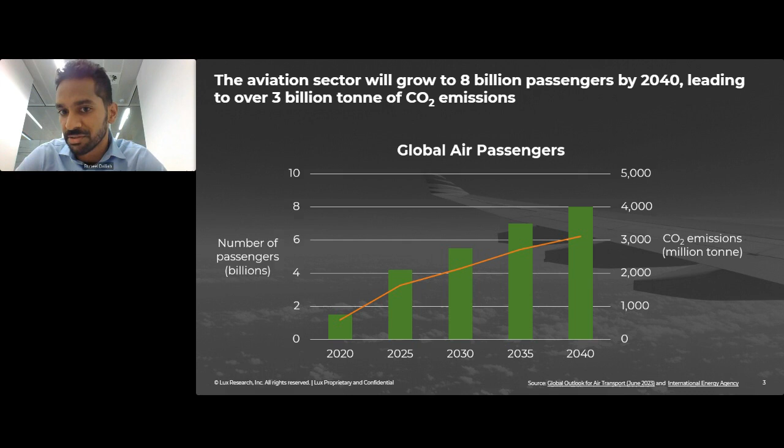Now, together with that growth in global air passengers, you also have an increase in CO2 emissions. What you see here on the orange line is a projection of CO2 emissions, assuming that we make no efforts to reduce these emissions. Today, we're at around 2,000 million tons of CO2 emissions. If we keep on going as we are today, then we'll reach around 3 billion tons of CO2 emissions.

However, there are initiatives globally around making sure that this does not happen. And one of the major initiatives is the one that has been undertaken by the IATA. The IATA is a global trade association. It's the world's largest association of airlines, and the IATA has over 300 airlines from more than 120 countries.

Now, a couple of years ago, the IATA reached an agreement. And this agreement from the different airlines says that they will do their best in order to reach net zero emissions by 2050. So this was a very big milestone in the aviation sector because now you finally have a target for net zero emissions, and that target is 2050. After announcing that pledge, it is now every airline's responsibility to take measures in order to reach that target by 2050.

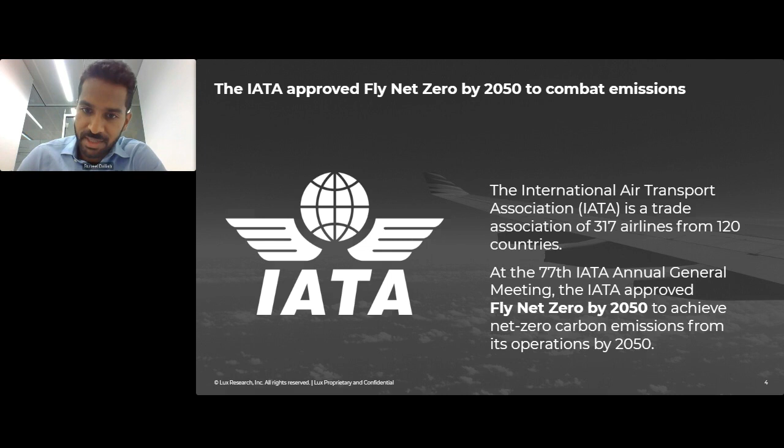For this presentation today, we'll focus on British Airways. Why British Airways? No particular reason other than British Airways is one of the largest airlines in the world and also one with one of the largest networks of destinations. So let's take a closer look at British Airways.

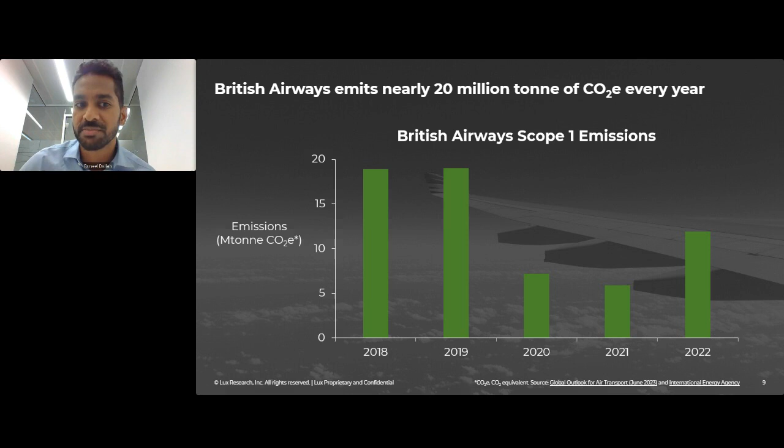So this is a challenge for British Airways: they need to reduce these emissions all the way to zero by 2050. So how can British Airways achieve this target? There are different measures that the company can take. One of the major levers available to airlines is efficiency improvement, essentially making your operations more efficient, buying new fuel-efficient aircraft, and so on.

But what we're here to talk about today is the really novel technologies available to airlines like British Airways to decarbonize their operations. From a technology perspective, there are three options available to airlines around the world. These are electric aviation, hydrogen aviation, and sustainable aviation fuel. So starting with electric aviation, how does that work in the case of an airline like British Airways?

Now, the concept of electric aviation is very similar to an electric car. It's essentially a vehicle that is powered by a battery. In this case here, that vehicle is an aircraft. Now, all electric airplanes will be powered by a battery. So how do you segment the space? The best way to segment the electric aviation sector is by looking at the type of aircraft and the markets that they are targeting.

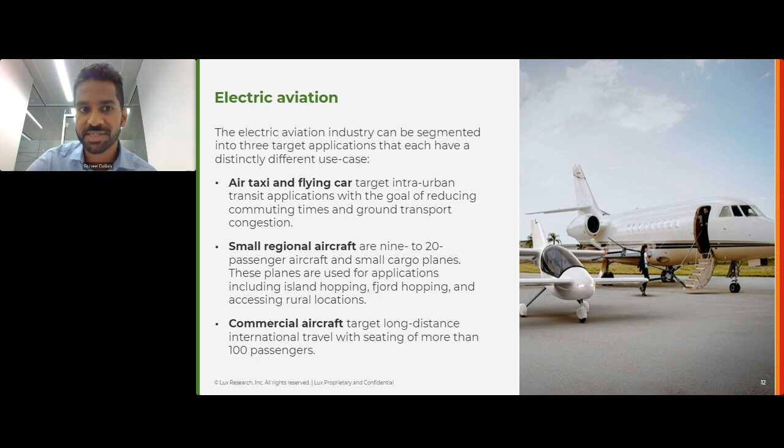Today, electric aviation can be segmented into three different groups. The first one is air taxis and flying cars. The second one is small regional aircraft. And the third one is commercial aircraft. So what are air taxis and flying cars specifically? Air taxis and flying cars are very small aircraft that can fly over short distances.

And the key differentiator here is the fact that these types of aircraft are pursuing vertical takeoff and landing configurations. The big advantage of that is that you don't actually need a landing strip, which means that these aircraft are very well suited for densely populated areas. The challenge, however, is that you cannot fly over long distances with this aircraft, and it's a very small aircraft, so you can carry at most 5 to less than 10 passengers.

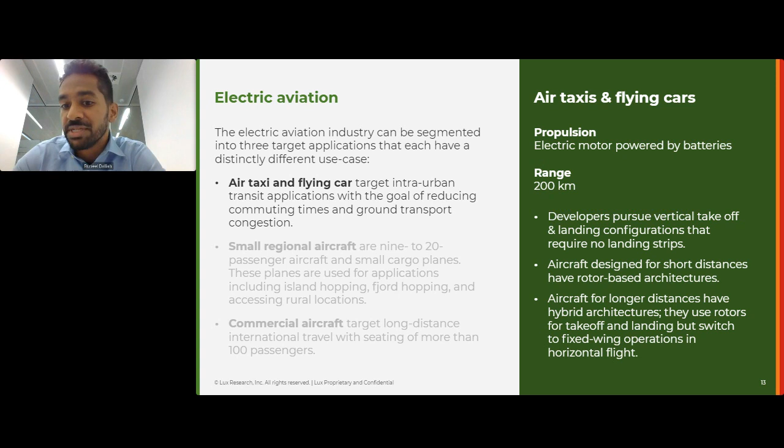So while this is an interesting technology, it's not really relevant for British Airways because British Airways is not really in the business of taxis. The second category is small regional aircraft. This follows a more conventional configuration. It follows a fixed wing architecture, which means that for this aircraft, you do need a landing strip.

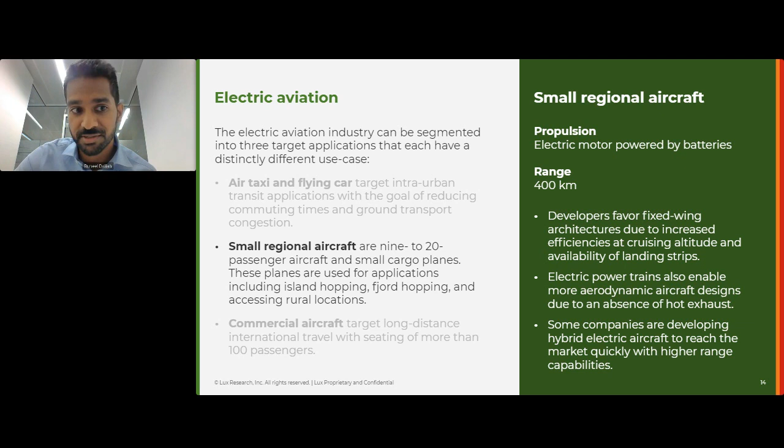Now, while this is interesting, again, it's not really relevant for British Airways because British Airways is in the business of commercial aviation. They're in the business of flying a lot of passengers over long distances, which means that commercial aircraft is what is relevant to British Airways.

Now, commercial aircraft is very much at the early stage today. This is about electrifying a commercial aircraft, even though in most cases, the commercial aircraft will be deployed in hybrid configuration together with hydrogen or with jet fuel. Now, the goal here is not to really reinvent the design of the aircraft, so you're still using a fixed wing configuration, which means that you would still need a landing strip.

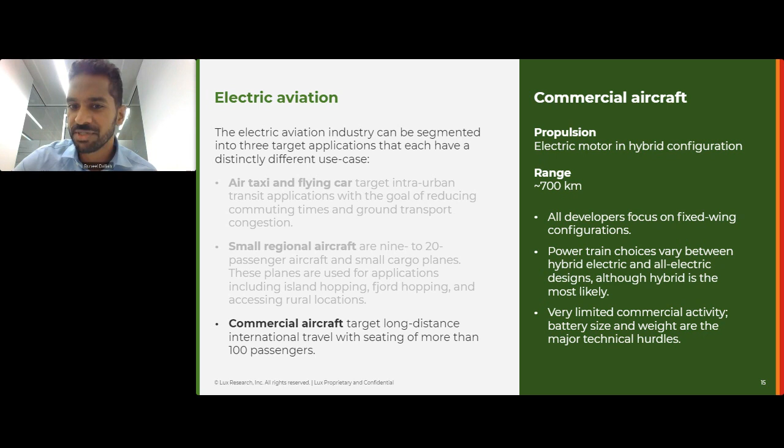However, there's very little commercial activity in electric commercial aircraft. Today, you only have a couple of companies working on this. One of the companies active in the space is Wright Electric. Now, Wright Electric is a startup currently at the early stage, and they're now looking at launching a commercial scale electric aircraft. So right now, they're very much at the small scale.

They are testing an all-electric aircraft, a very small 2 megawatt motor, but their goal, their target, is to actually launch a 186-seater commercial aircraft that could potentially fly a distance of 800 miles by 2030. So this is one of the most innovative developments happening in the space. And as you can see in the figure, you can see the EasyJet logo. This is because EasyJet in the UK has partnered with Wright Electric in order to develop and eventually deploy this aircraft in the market.

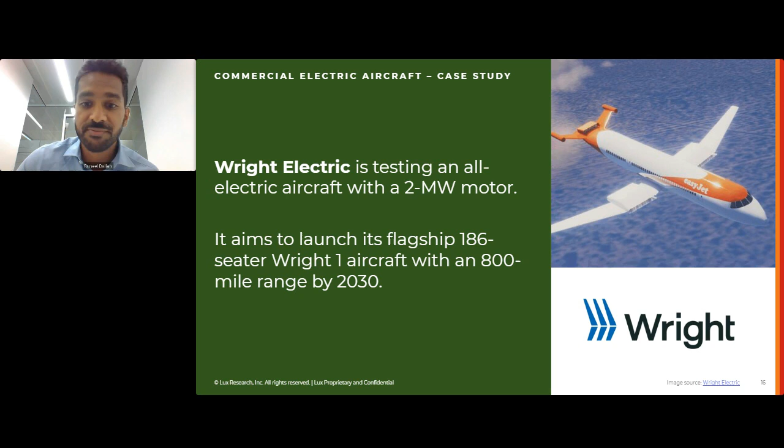But what is the challenge with electric aviation? Why don't you see electric planes flying all over the place? The reason for that is because of the battery that you need. Now, the main challenge with electric aviation is related to energy density. And here on the figure are the energy densities of batteries versus that of kerosene, which today is used as the fossil jet fuel. Now, most commercial aircraft are relying on the lithium-ion battery. The lithium-ion battery is very good for electric cars, but it's not very good for electric airplanes because it has a very low energy density compared to kerosene.

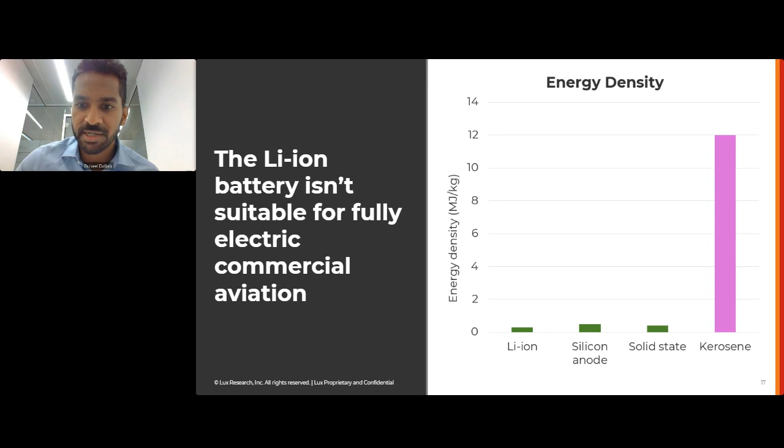If you want to deploy an electric aircraft that flies over the same distance as a conventional aircraft, you would need such a big battery that the plane would be just too heavy to operate. And even if you look at the next generation batteries, like silicon anode, for example, or solid state, they also have a very low energy density. So that's the reason why it is so challenging to deploy electric airplanes. And the only way to do that would be to deploy batteries in hybrid configuration with either hydrogen or with jet fuel.

But let's imagine a scenario in the future where Wright Electric has actually managed to launch their 186-seater airplane in the market by 2030. And let's imagine British Airways has partnered with Wright Electric and they're now using this specific electric aircraft in their commercial operation. So what does that look like for British Airways? How far can they fly with this all-electric airplane? And the answer to that is here on this figure.

With an electric airplane, British Airways could potentially fly from Heathrow all the way to Frankfurt in Germany. Now, as you can see in the figure, this is a very small range. They can't really fly very far with this electric airplane. But what's important to note here is that British Airways is actually hitting many of the key destinations in Europe. That includes Frankfurt, Schiphol in Amsterdam, and Charles de Gaulle in Paris. So these are all major hubs in the European aviation market.

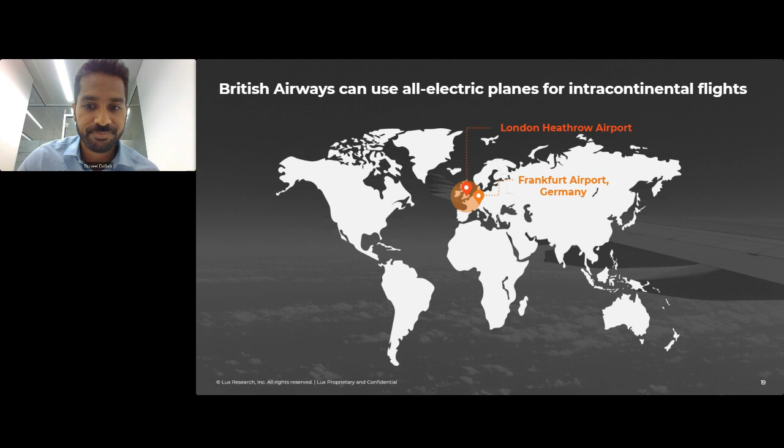And if you remember, most of British Airways destinations are actually in Europe. So even if the range of the electric airplane is very small, British Airways can actually capture quite a large share of its global destinations. So this is for electric aviation. What about hydrogen aviation? Now, there's also activity happening in hydrogen aviation. So how do you segment the space of hydrogen aviation?

Now, unlike electric aviation, where every aircraft was using a battery to power their operation, in hydrogen aviation it's a little bit different. You have two choices: fuel cell or combustion. Fuel cell is where you feed the hydrogen into the electrochemical system to produce electricity, and water is the only emission. And combustion is simply burning the hydrogen in order to produce power to operate the airplane.

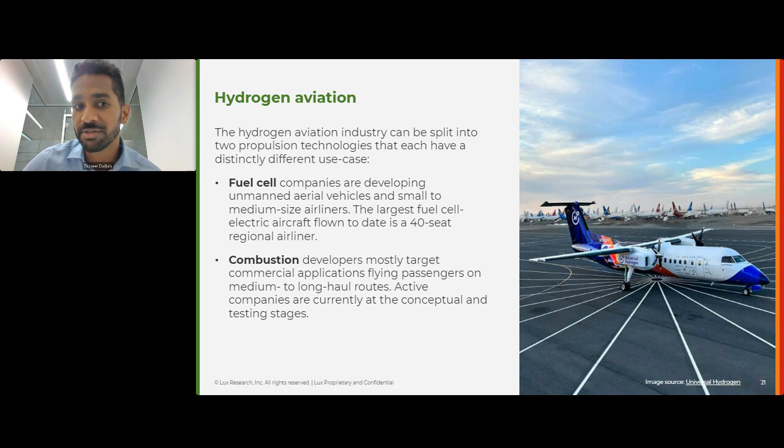So, how do you use a fuel cell in a hydrogen aircraft? The fuel cell is connected to an electric motor. Today, companies are targeting the proton exchange membrane fuel cell. It's the same type of fuel cell that is deployed in hydrogen fuel cell vehicles today. And the reason they are targeting this system is the same as in fuel cell vehicles: these fuel cells can operate at low temperatures, but they can also operate in dynamic mode.

Now, companies are targeting full hydrogen airplanes powered only by a fuel cell, but you can also deploy these fuel cells in hybrid configuration with batteries or even in combustion engines. The main challenge with fuel cells is really the operating conditions. When you use a fuel cell in a car and you simply drive the car over the road, you don't really face many challenges around operating conditions.

It's very different when you're flying an aircraft, because when you fly the aircraft, you go to very high altitude, which means that your conditions around temperature, pressure, and also oxygen concentration will also change. Now, these fuel cells, they have not been developed for high altitude operation. They have been developed for vehicles, which means that if you want to use these fuel cells in airplanes, you really have to take into account the impact that changing operating conditions will have on the fuel cell.

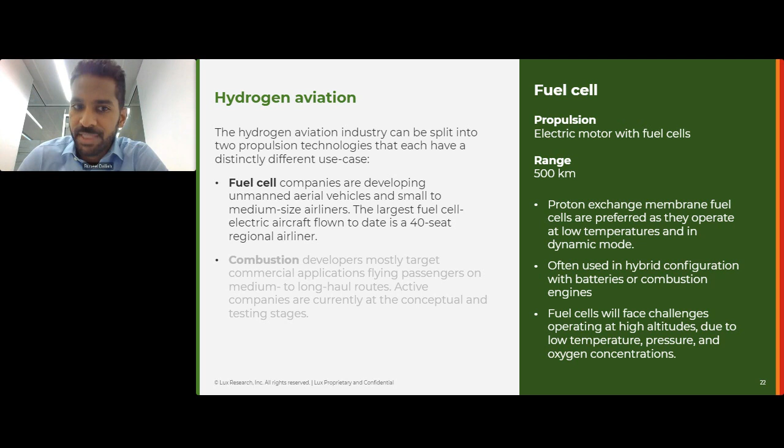Now, one company that is innovating in the space is ZeroAvia. ZeroAvia is currently at the trial stage right now. So they recently just demonstrated a 6-seater aircraft that they flew in January 2023. So this was one of the first demonstrations that we've seen in hydrogen aviation.

Now, ZeroAvia is currently at the trial stage, but they have already announced their target for development. The first milestone is 2025, where they intend to launch a 19-seater airplane that could potentially fly 300 miles. And the second target is 2030, where they have a very ambitious target of flying a 200-seater plane that could fly potentially over 2,000 miles. So this company is very much at the early stage, but they have quite ambitious targets for deployment.

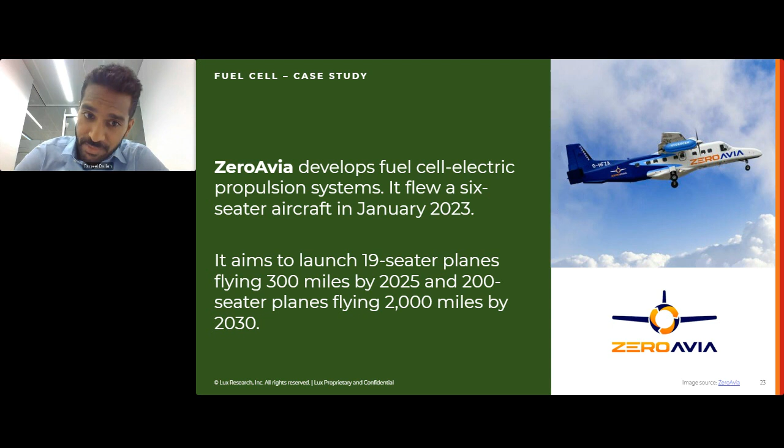The second option in hydrogen aviation, and the one that is really relevant to airlines such as British Airways, is hydrogen combustion. And why is it relevant? Because of the range that you can see here. The range is very big. It's over 3,700 kilometers. Now here, it's essentially the same approach as you have in a jet fuel engine, where you rely on combustion. In this particular case, developers are relying on liquid hydrogen, where you feed the liquid hydrogen into a jet engine.

Now, even though the approach is the same, you rely on combustion, you can't simply use a conventional jet fuel engine and simply put liquid hydrogen in it. Here you have to redesign the combustion engine. You have to develop an entirely new system in order to accommodate liquid hydrogen. And the main challenge with using hydrogen is around flame stability. So you have to make sure that the combustion profile is very stable over the lifetime of the system.

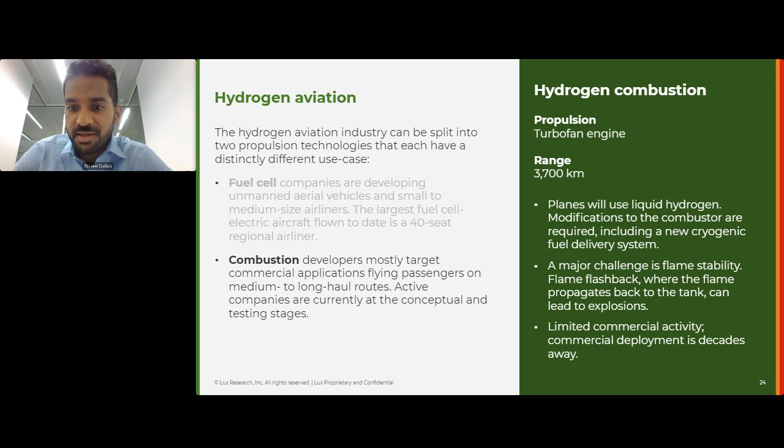Now, it's very challenging to develop a commercial scale hydrogen combustion engine for a commercial aircraft, which is why you have very limited activity in this space. But by far, the main player in this space is Airbus. So Airbus made quite a splash in the news 2 years ago when they launched their ZEROe initiative back in 2021. And with this initiative, Airbus unveiled 3 concepts, so 3 different designs for commercial aircraft that are powered by hydrogen combustion. Now, these designs are not for small planes. These designs are for very large aircraft that can carry hundreds of passengers over long distances.

Now, the designs vary in terms of the configurations of the airplanes, but the most conventional one, the turbofan plane, can potentially fly over 2,000 miles and carry up to 200 passengers. Now, bear in mind that this is a concept. This is not something that is happening today. Even though Airbus did not really disclose a timeline for deployment, we expect that if they manage to succeed in this particular space, you will likely not have these aircraft until after 2035 or 2040. So there's still a long time to go for Airbus to have something commercial that is ready to be deployed into the market.

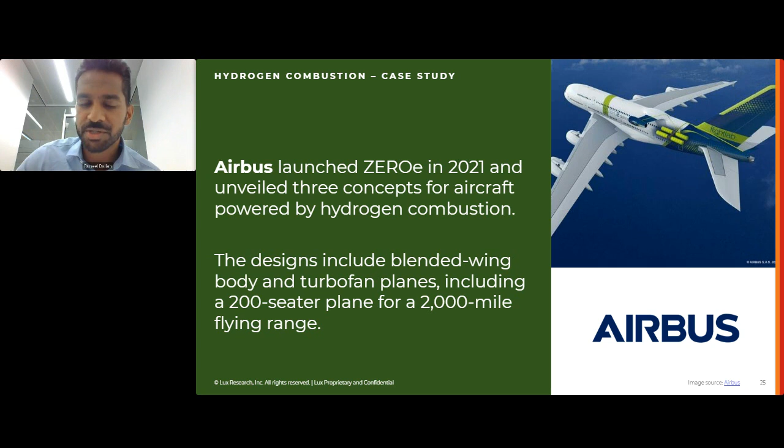But the challenge with using hydrogen in commercial aviation is very much the same as electric aviation. And again, energy density is the main challenge. Now, what you see here is the volumetric energy density of hydrogen compared to kerosene. Compressed hydrogen has an energy density of around 5 megajoules per liter, whereas liquid hydrogen has an energy density of around 8 megajoules per liter. Liquid hydrogen is more dense than compressed hydrogen, which is why developers are focusing on liquid hydrogen. But still, you can see that liquid hydrogen has a much lower energy density than kerosene, and 1 liter of kerosene is equivalent to 4 liters of liquid hydrogen. So that really puts into perspective the challenge that hydrogen aviation will have in order to match the performance of kerosene.

Now you can also see ammonia here. Every time we present this data, people come back and say, well, what about ammonia? Ammonia has a much higher energy density than liquid hydrogen. And they are right, it does have a higher energy density, but it's still much smaller compared to kerosene. So yes, even though ammonia has a higher energy density, it does not mean that it can match the performance of kerosene. And that's not even looking at the fact that ammonia is much more toxic, much more dangerous to handle than kerosene. So it's very unlikely that ammonia will ever be used in the aviation sector.

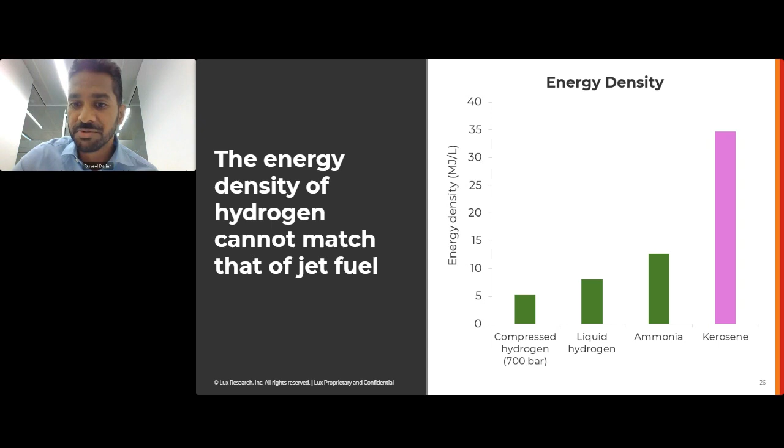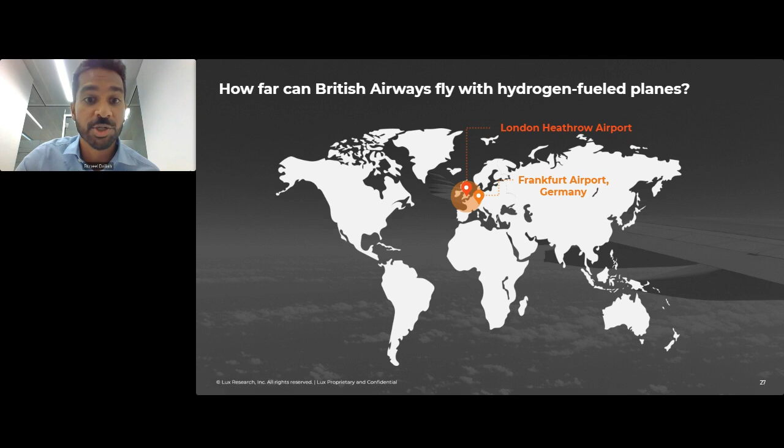But again, let's go back to our scenario. Earlier, we saw how with a fully electric airplane, British Airways can potentially fly from London Heathrow all the way to Frankfurt. But what about a hydrogen airplane? How far can British Airways go with a fully hydrogen airplane? Now, with a hydrogen aircraft, British Airways can potentially go all the way to Dubai in the Middle East, as well as to the JFK airport in New York in the US.

Now, this is very important because with a hydrogen airplane, British Airways could potentially cover all of its European destinations, which is by far its largest market share. But it can also reach very important hubs such as Dubai as well as JFK. So with a hydrogen plane, even though British Airways cannot go all the way to the rest of Asia or to South America, it can cover a very large share of its current network.

Now, remember, this is a hypothetical scenario. Airbus has not yet disclosed a timeline for the deployment of the hydrogen aircraft, and we don't even know if Airbus will be able to achieve that because it's a very challenging space to succeed. But in this hypothetical scenario, British Airways could potentially fly all the way to the US or to the Middle East with that hydrogen aircraft.

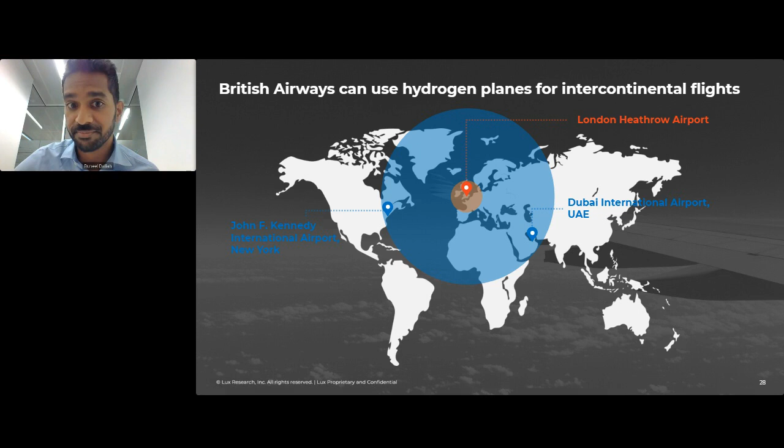So let's go to the last option available to British Airways, and this is sustainable aviation fuel. Now, sustainable aviation fuel is much more developed compared to electric aviation and hydrogen aviation. There's already commercial volumes of SAF being produced at scale today. So how do you segment the SAF space? The best way to do that is to look at the source of feedstock, what type of feedstock is being used to produce a sustainable aviation fuel. And today you can either use bio-based feedstock, which is everything from vegetable oil, from biomass, from sugars, but you can also use CO2 or hydrogen gas, and this is synthetic fuels.

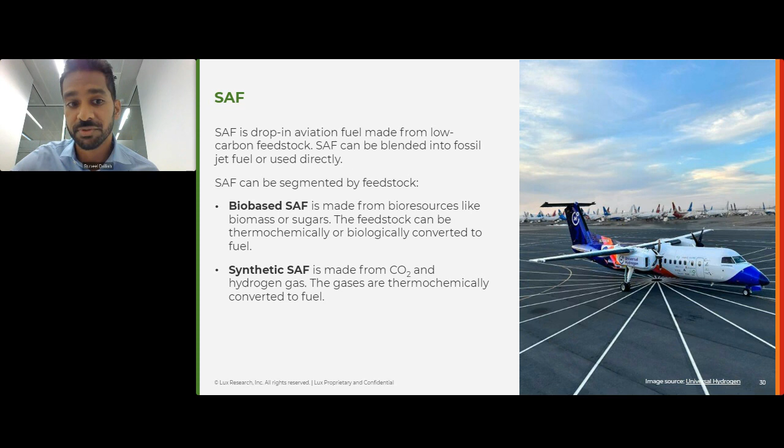Now, as I mentioned earlier, this is a commercial space. It's already being produced at scale today. Now, back in 2019, not much SAF was being produced at scale because SAF is still much more expensive than fossil fuel. And in 2020 and in 2021, we had the pandemic. Not many planes were flying at the time. There was not much reason to produce a large amount of SAF. But you can see that as the sector recovered in 2022 and in 2023, the production of SAF has increased. And today, or at least last year, we produced around 500,000 tons of sustainable aviation fuel.

Now, the IATA projects that by the end of this year, in 2024, we will reach a production of around 1.5 million tons of SAF. We think that it's unlikely. We think this is a bit too optimistic. The likely scenario is that production will increase, but will likely reach around 800,000 tons to 1 million tons of SAF. We think that an increase all the way to 1.5 million tons is unlikely because today SAF is still expensive, and even though the policy market is getting better with the IRA in the US and ReFuelEU in Europe, it's very unlikely that these policy movements will lead to such a big increase in SAF production.

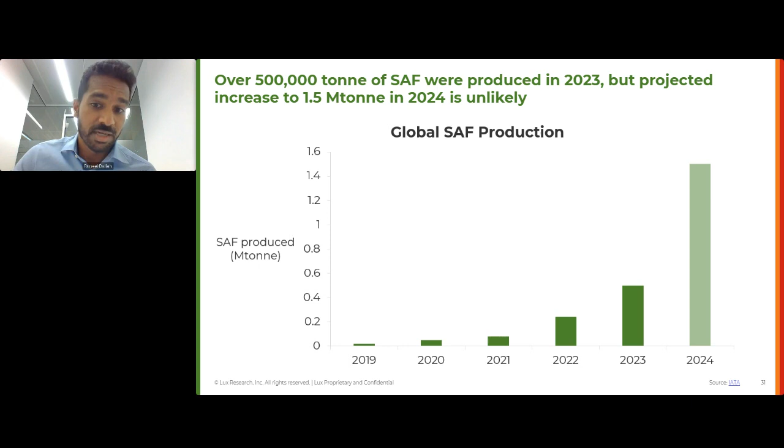So how does it work? The HEFA pathway is essentially taking bio-oil, which is either vegetable oil, soybean oil, for example, or waste oil, like used cooking oil or animal fats. What the goal here is to convert this oil into a fuel fraction with the addition of hydrogen. Now you essentially hydrogenate the oil, you refine the mixture to produce SAF, but also renewable gasoline and renewable diesel.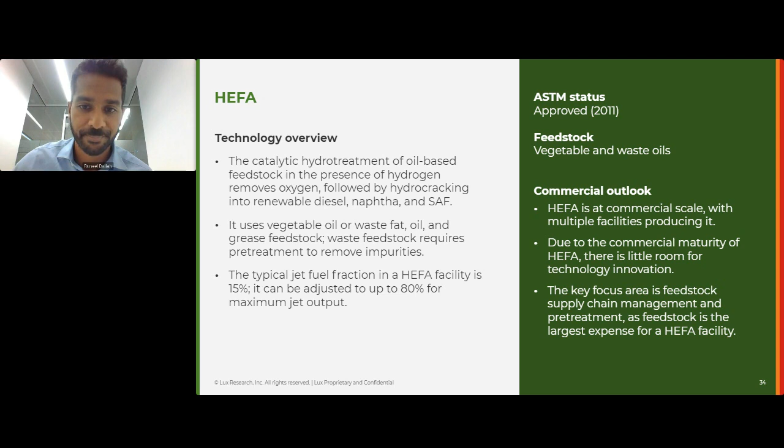Now, this is a commercial pathway, and you already have commercial facilities. And the largest company in this space is Neste, based in Finland. Neste is currently operating 2 biorefineries, one in the Netherlands and one in Singapore, that have a combined capacity of 3 million tons of renewable fuel. Now, bear in mind that this is renewable fuel, which includes everything from renewable gasoline, renewable diesel, as well as sustainable aviation fuel.

Now, even though Neste has not really disclosed how much of that 3 million tons per year is SAF, we expect that number to be very low because the market for renewable fuels today is really in the road transportation sector and not yet in the aviation sector. But essentially, if the demand for SAF really goes up in the future, Neste has the flexibility of diverting some of their fuel production away from road transportation and into the aviation sector.

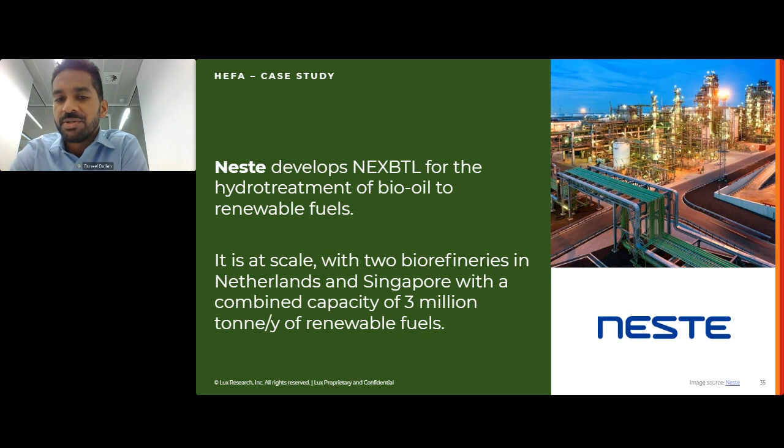Now, the second pathway currently in development is known as Fischer-Tropsch. Fischer-Tropsch is a thermochemical pathway where you take syngas and convert that into liquid hydrocarbon, which is then refined into fuel fraction, diesel, jet fuel, as well as naphtha and waxes. Now, the syngas can come from any source. It can come from coal or natural gas, for example, even though today no one is looking at producing jet fuel from natural gas or coal.

Most companies are focused on sustainable feedstock, and in this case here, you can potentially use municipal solid waste or biomass, which you can gasify into syngas, or you can use hydrogen and CO2. This is known as synthetic fuel, where you convert the hydrogen and CO2 into syngas, and then you feed that into a Fischer-Tropsch reactor. Now, this is currently in development. Today, you only have a demo scale facility that was launched 2 years ago.

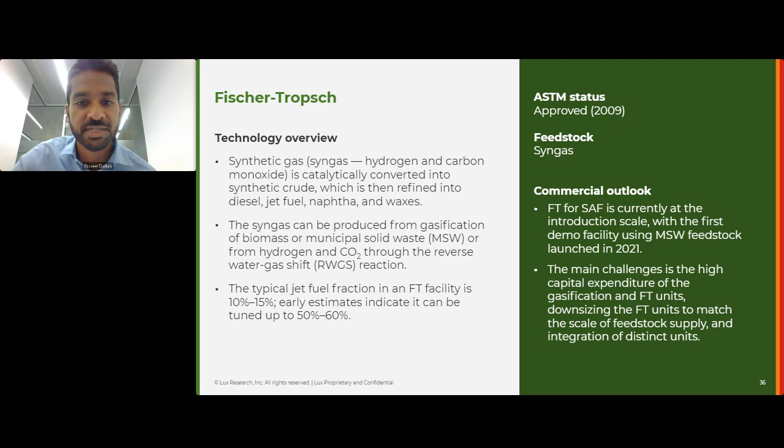And the main challenge with Fischer-Tropsch is really the cost of the technology. Both the gasification unit and the Fischer-Tropsch unit are very capital intensive, it's very expensive, and you also have the added challenge of integration. Integrating these 2 units is a very complex approach, which not many companies have succeeded at so far.

Now, one of the success stories in this space, and really the only one so far, is Fulcrum Bioenergy. Fulcrum Bioenergy is a startup based in the US, and 2 years ago, they launched the first demo-scale facility producing SAF from a bio-based feedstock. In this case here, it's MSW. Fulcrum Bioenergy takes the MSW, they gasify it into syngas, and then turn that syngas into fuel.

That facility is a demo-scale facility. It has a production capacity of 10 million gallons per year, although it's unlikely that today Fulcrum is actually using the full capacity of that facility. Now, what's important to note here is that Fulcrum Bioenergy is actually using the Fischer-Tropsch technology from Johnson Matthey, who is one of the leaders in this space.

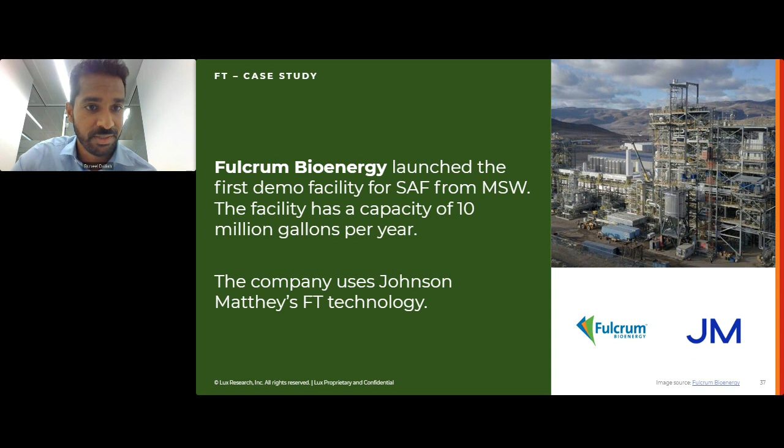Now, the third and last pathway which we'll look at today is the alcohol-to-jet pathway. As the name says, this is a pathway where you convert the alcohol into jet fuel. And today, the only alcohols approved for commercial operation are ethanol and isobutanol. So this is a pathway where you essentially dehydrate the alcohol into its alkene, and then you oligomerize this alkene into long-chain hydrocarbon, which you then refine into fuel fractions.

Now, this is not yet commercial. This is currently in development, but the first demo facility was actually launched just 2 weeks ago by LanzaJet in the US. Now, the advantage of this platform is that on paper, it's meant to be cheaper than the Fischer-Tropsch technology, because here you're using inexpensive systems as well as catalysts. But again, this is currently in development, and it remains to be seen whether this technology is actually much cheaper than the Fischer-Tropsch pathway.

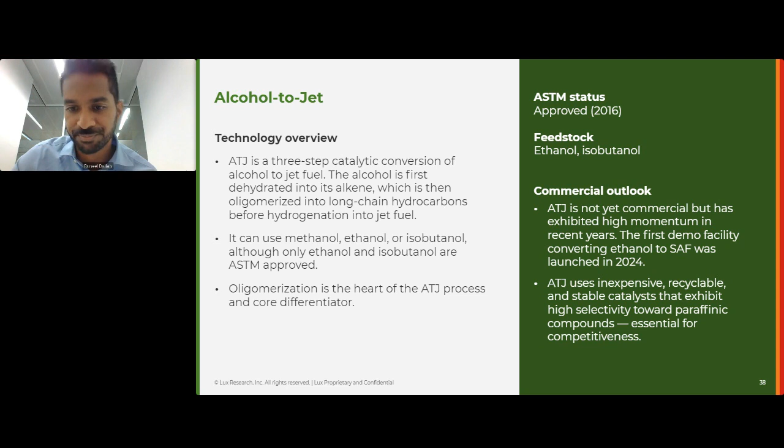But we'll know very soon, because LanzaJet actually launched the world's first demo facility for alcohol-to-jet. In this case here, LanzaJet launched a 10 million gallon per year facility in the US, where they are converting, or they will be converting, ethanol into jet fuel.

So with this facility, LanzaJet will be able to really optimize the system, learn from the system, and eventually use these learnings in order to scale to a much bigger capacity. And also the important thing to note here is that the ethanol that LanzaJet is using is first generation ethanol, likely corn ethanol, which is widely available in the US.

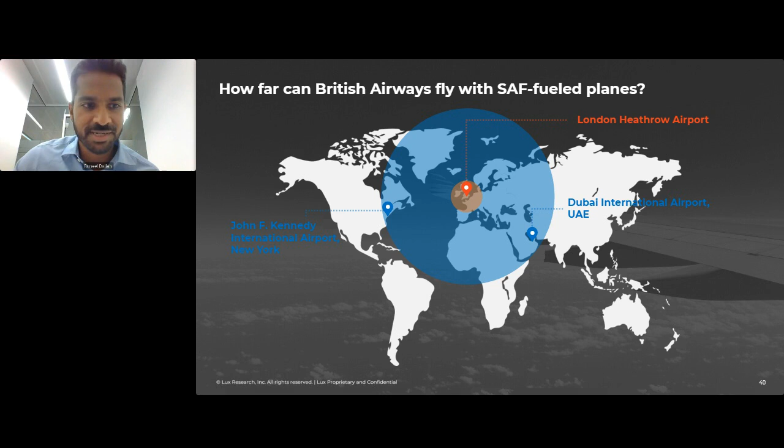Now, going back to our scenario, we've seen how with an electric airplane, British Airways could fly to some parts of Europe. With hydrogen airplanes, British Airways could cover all of Europe as well as parts of the Middle East and the US. How far can British Airways fly with a SAF fuel airplane? Well, the answer in this case is less interesting than before, because technically SAF is almost identical to fossil jet fuel, which means that with SAF, British Airways can cover its entire network, as you can see here on this figure.

Now today, the longest flight that British Airways is operating is the flight from London Heathrow to Santiago Airport in Chile. This is a 14-hour flight, and with a SAF fuel airplane, British Airways can easily reach that destination. So in this hypothetical future scenario, you could expect British Airways to use electric airplanes for Europe, hydrogen airplanes for the Middle East and the US, and SAF for the rest of its network.

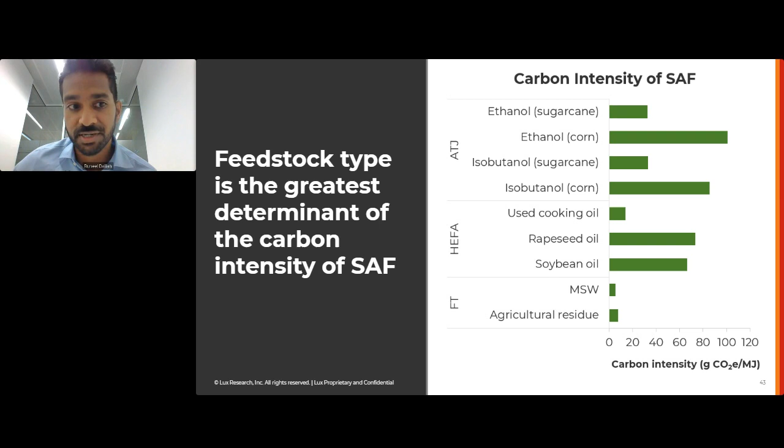You can potentially reach a lower cost SAF if you were to use waste oil, for example, but then you run into the issue of supply. If you want to use MSW, then here you have to use the Fischer-Tropsch pathway, which is expensive and complex to scale. In the case of alcohol to jet, you can potentially get a cheaper fuel if you were to use ethanol, but ethanol is a first generation feedstock, which means that you won't be as sustainable, especially if you're operating in regions like the EU, for example.

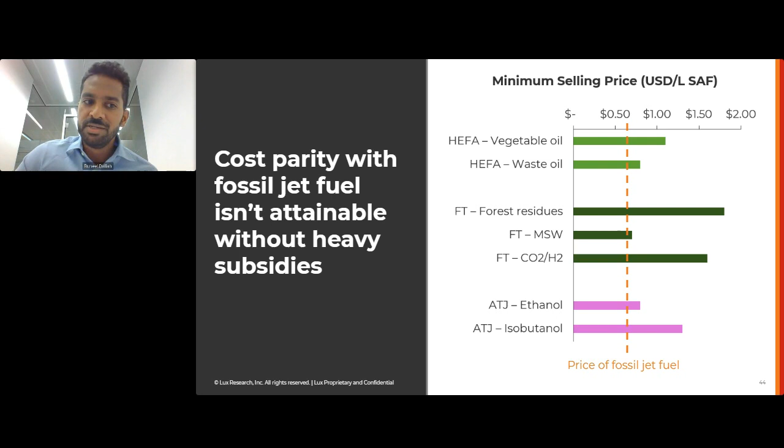So you can see that when it comes to SAF, you have a range of challenges, and each of the three technology options available today overcome some of these challenges, but none of them overcome all of the challenges. To recap, for HEFA, it's a commercial technology. It's low cost if you're using vegetable oil, and you have a robust developer landscape here. You have very good companies active in the space. However, if you're using vegetable oil, that means you are unsustainable. If instead you want to be sustainable and use waste oil, you then run into the issue of feedstock supply.

In the case of Fischer-Tropsch, if you're using municipal solid waste or agricultural residues, then you are sustainable and you have access to a wide range of feedstock. And you also have very strong companies operating in the space, because this is where you have Johnson Matthey, Topsoe, Shell, Sasol, and so on. However, there are many challenges with Fischer-Tropsch technology itself. It's very capital intensive and it's also quite complex to scale.

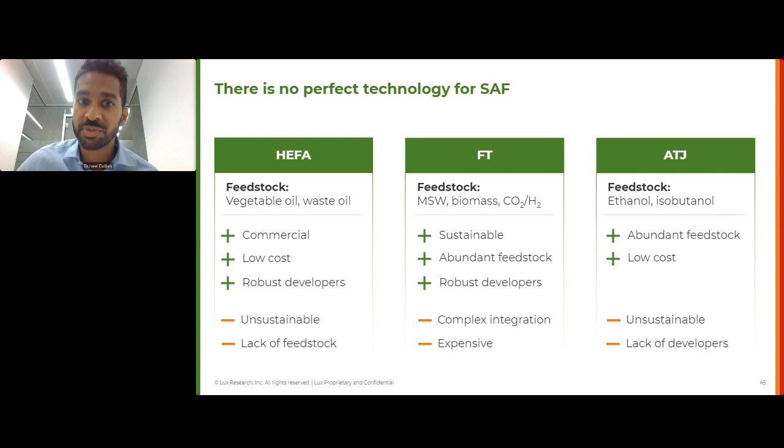With alcohol to jet, you have access to an abundant source of feedstock, because here you're using ethanol or isobutanol, and it's also a low-cost technology. However, ethanol and isobutanol are first-generation feedstock, which means that it's not sustainable, and it also does not have many players in the space, because this space today is mostly dominated by startups like LanzaJet, like Gevo, which, even though they are good companies, they're not really the type of companies to build very large-scale facilities. So you can see that today, the options that we have for SAF are good enough for the near term, good enough to scale the industry, but they're not perfect in order to support the global SAF sector.

Now, the perfect SAF technology is the one that ticks all the boxes, the one that has all the characteristics that you see here on the left. So is there a SAF technology in development today that actually ticks all these boxes? We think there is one, and that technology is known as methanol to jet. Now, how does methanol to jet work? Methanol to jet is essentially where you're relying on green methanol. So green methanol produced from CO2 and green hydrogen, you combine it into methanol, and you then turn that methanol into jet fuel. So methanol to jet is a type of alcohol to jet pathway, although methanol is not yet approved. So this is something that you cannot do today. You will have to go through the whole process of getting methanol approved as a feedstock before you go to the market.

But why do we say that methanol to jet is as close as you can get to a perfect SAF technology? It's because with methanol to jet, you have access to abundant and sustainable feedstock, because if you're relying on CO2, either from direct air capture or carbon capture, or on green hydrogen, this is widely available, or it will be widely available very soon, and it's also very sustainable. The other advantage is the technology. Alcohol to jet technology is not a very complex technology, which means that it can quite easily be scaled.

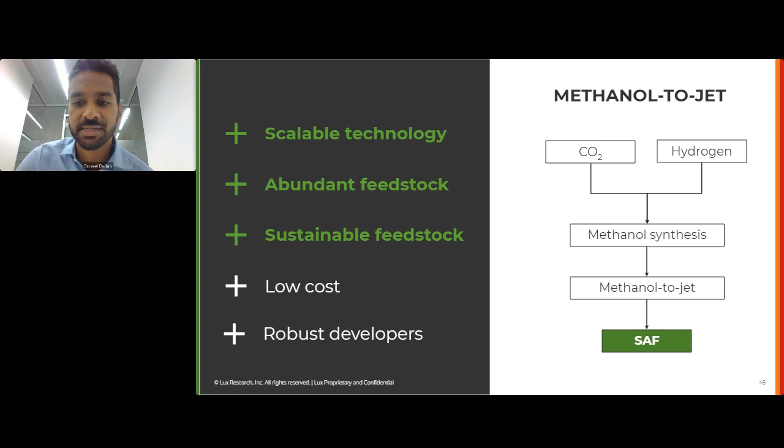The other aspect is the cost of fuel production from methanol to jet. Now, we're not saying here that methanol to jet is cheap, because as you can see in the figure, it's not. It's actually more expensive than ethanol to jet, for example. But methanol to jet competes directly with the Fischer-Tropsch pathway that is using CO2 and hydrogen. In this case here, you can see that methanol to jet is actually cheaper than Fischer-Tropsch. Now, methanol to jet is very much at the early stage today. So this cost that you see here is only an estimate. As the technology is being developed and scaled, we expect the cost of methanol to jet to actually go down with time.

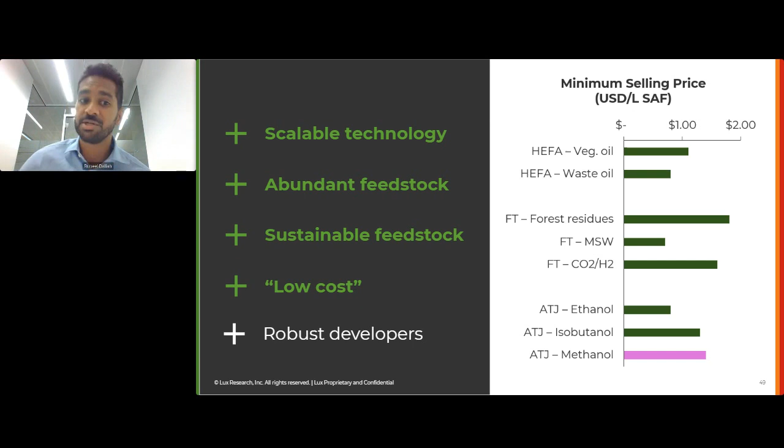But the other big advantage that methanol to jet has is really the strength of its development landscape. So what you see here are 5 different companies, 5 large corporations that are each developing their own methanol to jet technologies.

So these 5 companies have actually unveiled their methanol to jet technology last year. Here you have ExxonMobil, Topsoe, Honeywell, Total, and Axens, all of them already large players in the fuel sector today and looking at developing and deploying methanol to jet technology in the near term. So for all of these different reasons, scalable technology, abundant and sustainable feedstock, low-cost production, as well as strong development landscape, this is why we say that methanol to jet is the most promising opportunity in the SAF space today.

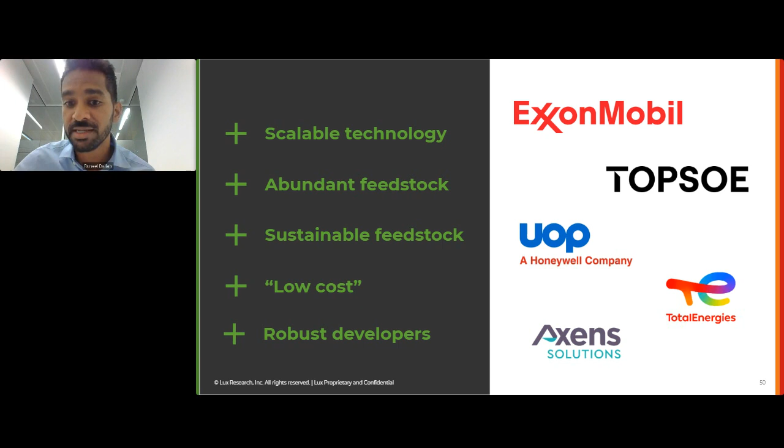If you look at the operations of British Airways today, British Airways has 5 daily flights from London Heathrow to Frankfurt. And for these flights, British Airways is using an Airbus A321 that can carry around 240 passengers. If British Airways were to electrify this flight, then they would need 2 electric airplanes in order to have the same capacity as an Airbus A321. And the reason for that is because the electric airplane that the company is developing can only carry potentially around 100 passengers. So in this case, they will need 2 aircraft to replace 1 Airbus.

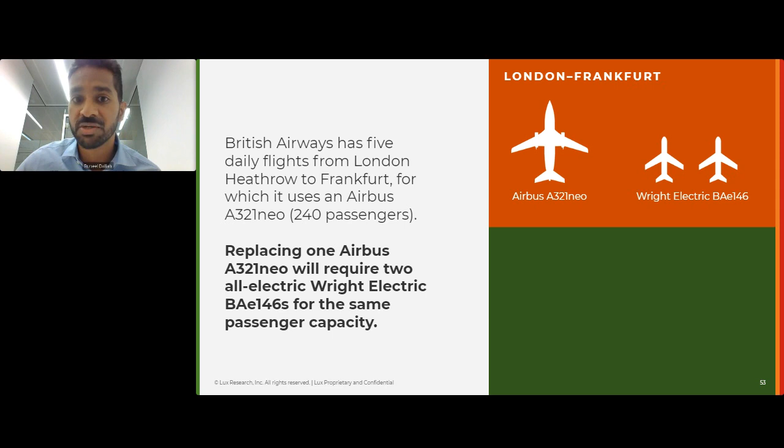And the same thing goes for hydrogen aviation. Today, British Airways actually has 8 daily flights from London Heathrow to JFK. And for that, it's using a Boeing 777 that can carry around 370 passengers. If British Airways were to rely on the Airbus hydrogen airplane, it has a capacity of around 200 passengers. That means that British Airways will now have to fly 16 times from Heathrow to JFK in order to carry the same amount of passengers.

Now, looking at this, you may think that, okay, this is inconvenient because you have to replace every Airbus, every Boeing with 2 airplanes, 2 electric or 2 hydrogen airplanes. It's inconvenient, but it's not really unfeasible, because that's something that could be done, and you'd be right. However, bear in mind that British Airways is not the only airline operating out of Heathrow. There are actually many airlines using Heathrow as their base. And in 2019, before COVID, London Heathrow was actually already at capacity.

London Heathrow has a legal cap of 480,000 flights a year, and in 2019 they were almost there with 475,000 flights a year. Which means that if an airline like British Airways would like to deploy electric and hydrogen planes in order to decarbonize their operation, they will actually not be able to do so because there simply is not enough space at London Heathrow to accommodate these additional planes. Which is why, when it comes to decarbonizing the aviation sector with electric or hydrogen aircraft, the range matters. You have to be able to fly to your destinations, but you also have to make sure that there is space for your aircraft at these different airports. So airport capacity will absolutely be a bottleneck for electric and hydrogen aviation.

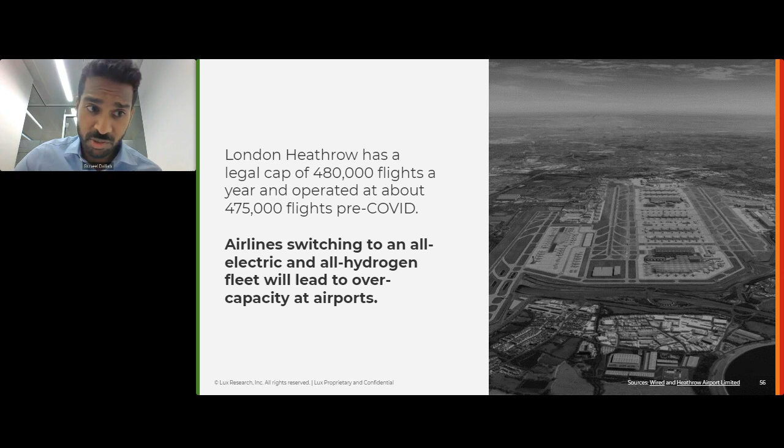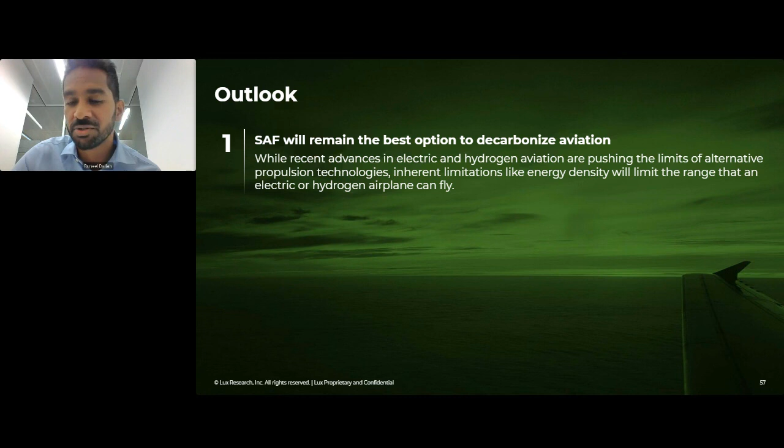So what are the key takeaways from this presentation today? The first takeaway is that SAF will remain the best option to decarbonize aviation. As you've seen, SAF is a much more developed technology for net zero aviation. It's already at a commercial scale, and there's already a lot of development happening to further scale the industry to meet the global demand for net zero aviation. Electric aviation and hydrogen aviation are interesting. However, they are limited in range, but more importantly, they are limited in capacity as well. So just because you can electrify or use a hydrogen plane does not mean that you will do so in the future, because airport capacity will be a bottleneck for the deployment of these aircraft.

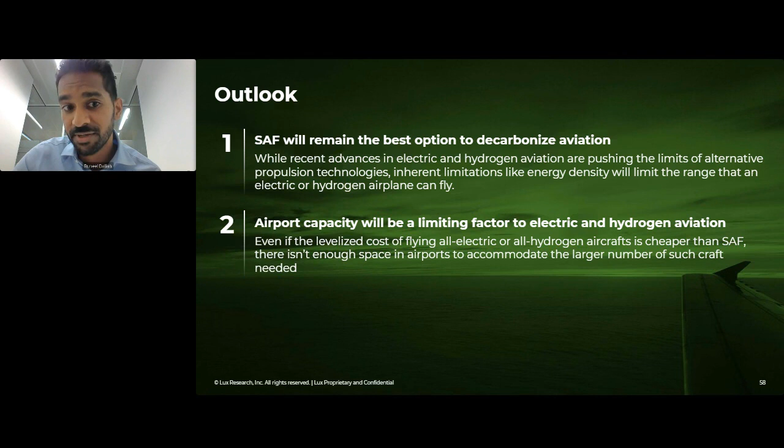And finally, when it comes to the best opportunity in net zero aviation, we think that methanol to jet is the most promising opportunity, because methanol to jet overcomes many of the challenges of finding the perfect SAF technology, which is a technology that has access to sustainable and abundant feedstock, a technology that can produce SAF at a low cost, and a technology that is supported by very strong companies.

So this is it from me today. I hope that this was helpful and interesting, and happy to take any questions from the audience.